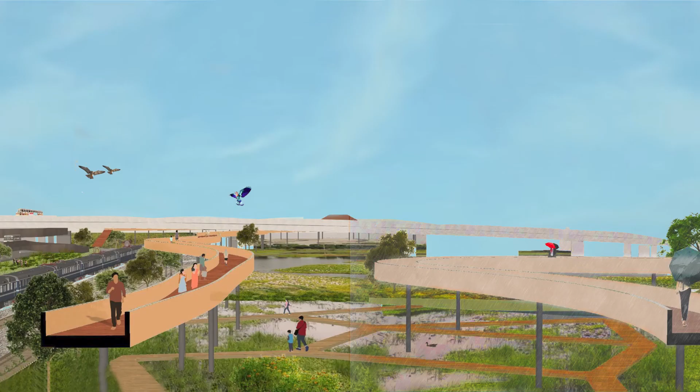So we are looking at one of the interventions that this team has done for their Ente Kochi, and we are going to look at the presentation to understand the strategies or the kind of ideas they have put in through landscape design. So let us proceed now to understand the way they have taken this.

Firstly, we would like to thank LS Raheja School of Architecture and New Arc Unlearn for giving us this opportunity to present our design proposal titled Jalapaatha, Envisioning a Wave of Life, which was submitted as part of the Mullassery Design Precinct, which was a part of the Ente Kochi competition held in August this year.

When we approached the brief, we had a few questions in mind. What scale of influence should we consider when we address a problem of urban stature? What are the benefits of reviving a man-made canal system, and what is its impact on the larger ecosystem? Given that the natural landform of the coastal plains is disrupted irreversibly by urbanization, how do we build resilience for the future? Traditionally, water systems have been associated with social, cultural, and ecological significance. How do we bring back this aspect of the link between man and water?

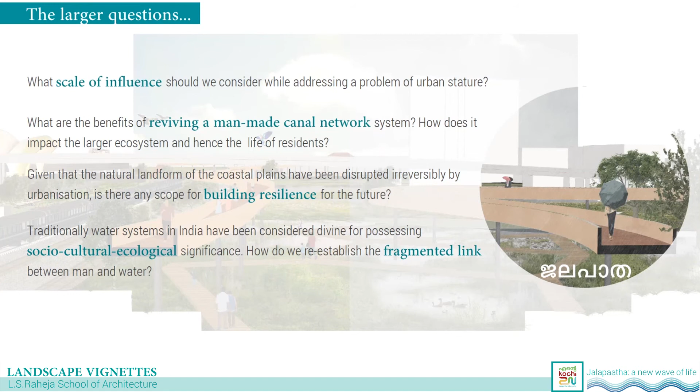So the relation of the canal to the larger context has been analyzed by examining the canal at three distinct scales, from a macro level to the site scale. The scales have been determined not based on the physical or administrative boundary, but we've broadly taken the area based on the ecological role played by the canal with respect to the larger natural systems. For each of the scales, while a few layers helped in understanding the larger natural systems, for the presentation, we'll be elaborating on the ones which have a direct influence on our design intent. Moving on to the next slide.

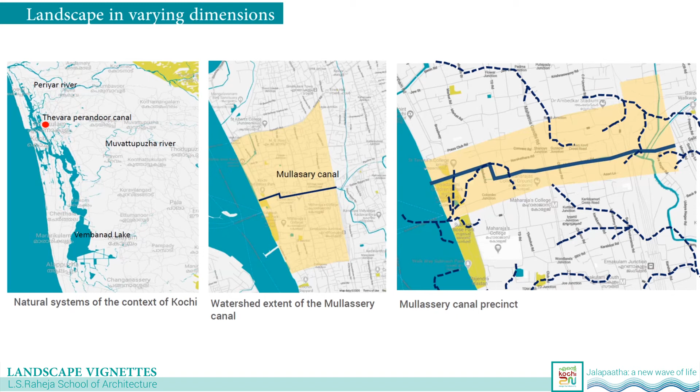So at the larger scale, we started with the understanding of landscape parameters such as climate, geology, and the soil strata. The original landform of Kochi comprised of alluvial bands with north-south orientation of alternating swales and sandbars. This enabled in channelizing the natural runoff from the region into the sea. With the advent of urbanization, there was the creation of artificial ridges which disrupted the natural watershed.

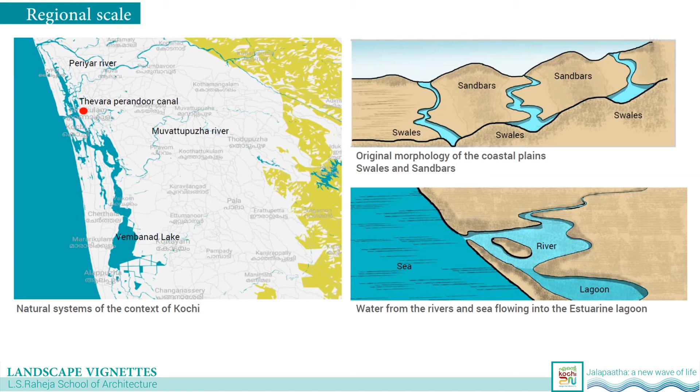Also, in the regional study, we realized that there are two main rivers which drain into the Vembanad Lake, which is the largest estuarine lagoon in India. This lake is a freshwater system during the monsoon and becomes a brackish water system during the dry seasons. Next slide.

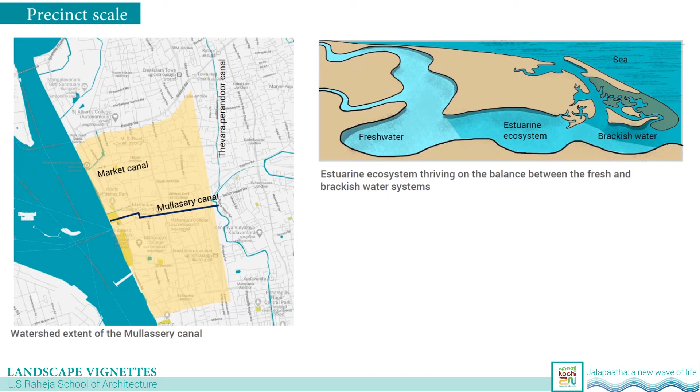So narrowing down further into the Kochi sub-basin, there are a number of streams which originate from the eastern lower hills, which meander across the flat terrain of the coastal plains and then drain into the sea. Also, we realize that the watershed is of a rectangular profile, which signifies more time of concentration and lower rates of runoff across the terrain. This creates the possibility of creating water detention structures along the canal precinct. Also, the drainage texture is coarse, which facilitates the percolation of water into the lower strata.

Also, there exists one main canal which runs parallel to the coast, which is this Thevara Perandoor Canal. And also, we have these subsidiary canals which run perpendicular to it. These perpendicular canals bring in the saline water from the sea into the Thevara Perandoor Canal. The Mullassery Canal, which is our site, creates an estuarine habitat, striking a balance between the fresh water from the Perandoor Canal and the saline water from the sea.

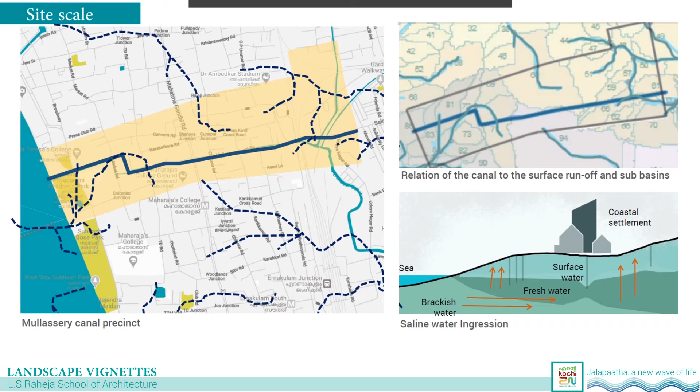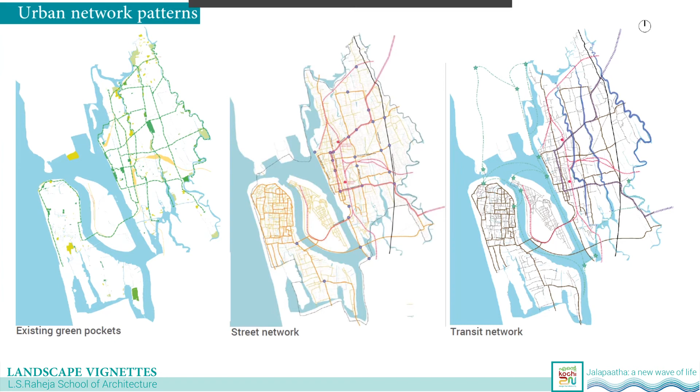So zooming further into the Mullassery Canal precinct, we observe a variety of urban practices that have resulted in the site being vulnerable to periodic flooding, vector-borne diseases, saltwater ingression, biodiversity loss, to name a few. The micro wetlands of the site have been converted into lands for development, and the canal itself has shrunk in its capacity to carry the overflow from the Perandoor Canal in the east and doesn't accommodate surface water discharge.

Seasonal tidal flooding from the western backwaters is also a concern that needs to be addressed while building dense urban blocks in proximity to this area. So this was in brief our landscape analysis for the site.

So the landscape study helped in establishing the role of the canal in today's scenario. In brief, the canal plays two important ecological functions. One is in creating a balance in the estuarine ecosystem, and the other one is in minimizing the saline water ingression. This established the premise for the revival of the canal, and additional interventions were looked at for the precinct to create a resilient landscape. Next slide. So the concept, strategic framework, and the master plan will further be discussed by Sivagami.

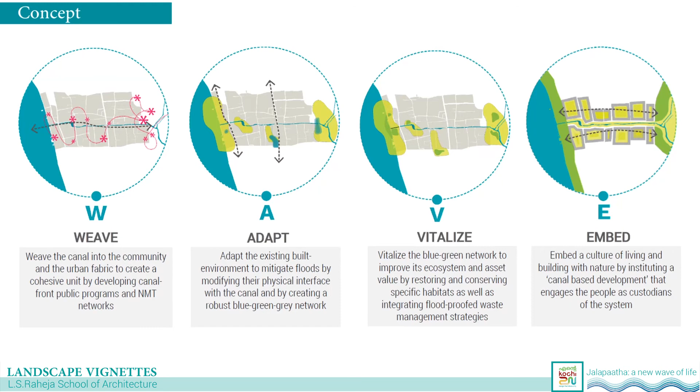So looking at the concept, we realized that the site needed an overhaul of systems as well as a new perception in which the natural ecosystem had to be viewed. We proposed the concept of a new wave of life, WAVE being an acronym here, where W is to weave the canal into the community, A is to adapt the existing environment to protect against flooding, V is to vitalize ecosystems and natural habitats local to the site, and E is to embed a culture of living and building with nature. Next.

In order to conceive a project based on the concept, we divided the site into logical parts, institutional, commercial, and transit hubs, which can then be planned together under the larger canal-oriented development, which comprises of planning and landscape strategies and regulations. Each hub may have a unique set of planning and landscape solutions based on the nature of the development in that hub and the nature of the natural systems and their physical connection to the canal.

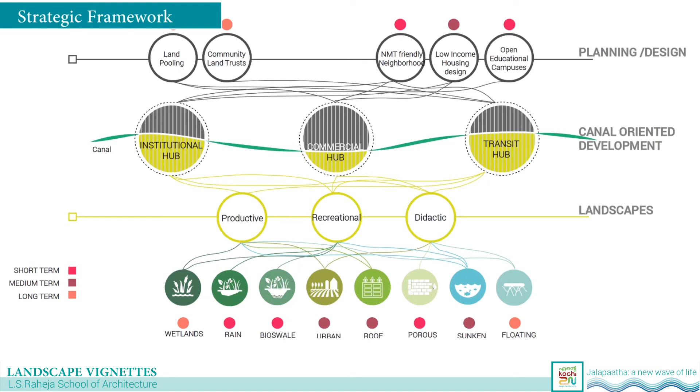Incorporating landscape solutions of 3 different types was also thought of, that is productive, recreational, and didactic. These solutions, apart from acting as open public spaces, also act as effective stormwater infrastructure. For a radical transformation, it is imperative to consider a phased implementation. The idea is to begin with short pilot projects, which have also been suggested briefly as part of this strategic framework. Next.

The nature of stakeholders plays a central role in the process of translating the concept to reality. We consider here that the canal itself is the primary stakeholder, a living entity that is connected to others in meaningful ways. Community land trust could be seen here as a way to provide affordable housing to the low-income families and reconstitute individual residential plots into a cohesive whole in order to enable working together to protect a common resource. Next.

The canal-oriented development, therefore, is envisioned in the three hubs respectively as an educational campus, a mixed-use zone, and a residential block. The educational campus is planned along with a connection to an active, non-motorized transport-friendly edge of the canal as well as a recreational landscape feature. Next.

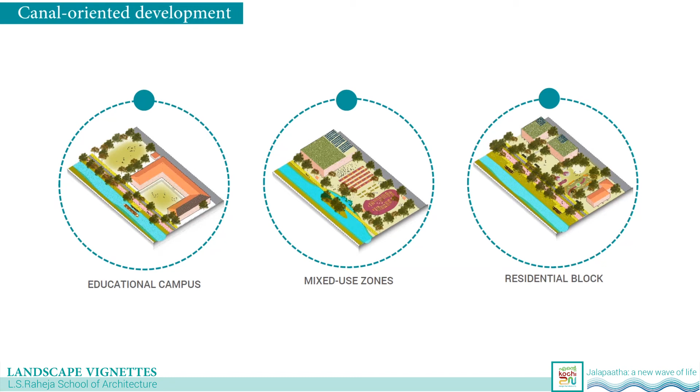A mixed-use hub may constitute didactic, recreational as well as productive landscape solutions such as roof gardens, urban farms, hydroponic farms, and community gardens. Next.

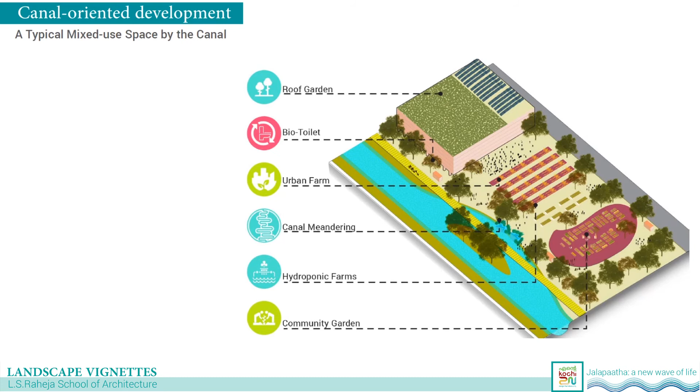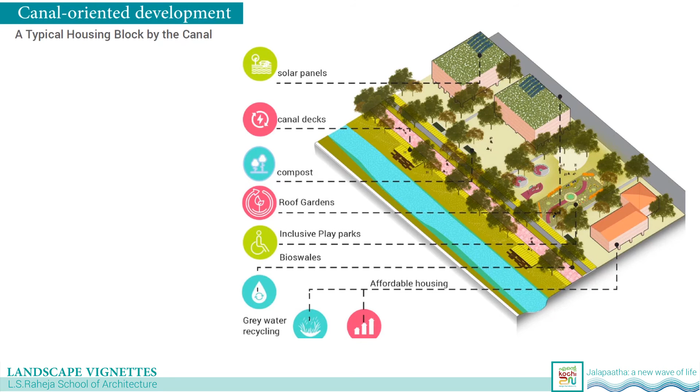The residential block emulates the characteristics of the mixed-use zone in addition to providing sustainable, affordable housing solutions. For instance, we've used solar panels on the roofs along with roof gardens and inclusive play parks. Next.

Now let's look at the master plan. The canal programmatically interacts differently at different portions of the site. The dedicated NMT network that acts as a primary horizontal connect enables the last mile connectivity for the metro and bus terminus while suggesting an alternative route for vehicular traffic.

Moving from west to east, the coastal edge constitutes a recreational and institutional land use, allowing scope for the creation of public spaces that can multiply as water storage and collection facilities. The central site, which is Site B, reconfigures the market experience by including the canal as an element connecting programs such as a transit plaza, the Fashion Street, and the Maharaja Ground.

The connection of the Mullasary Canal to the Perandoor Canal is a vital ecological node and is sensitively integrated into the design of the KSRTC bus terminus and the wetland park. Next.

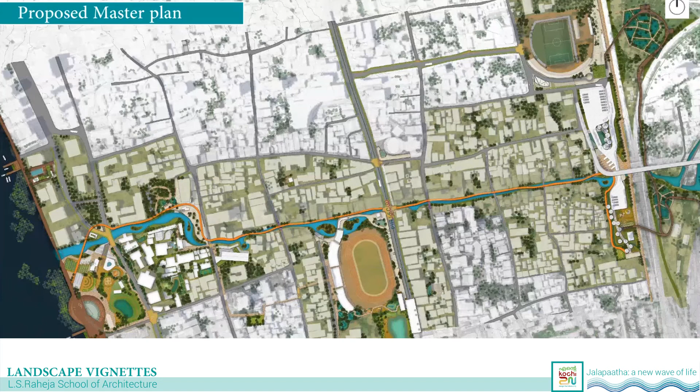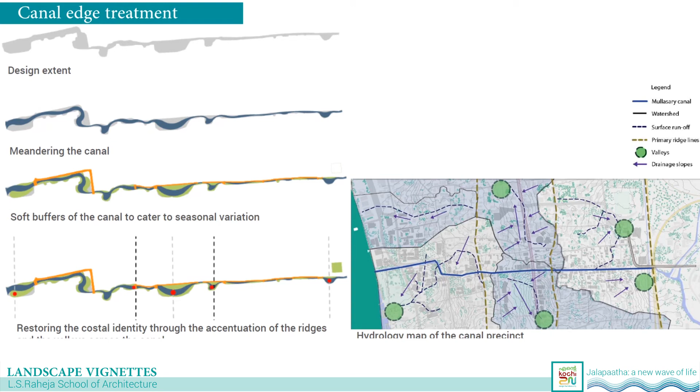Deriving from the landscape study, one of the ideas was to restore the landscape identity of the coastal plains by accentuating the flat terrain of the site in the form of alternating ridges and valleys. The idea was to break the rigid edges of the canal and meander it across the site with an elevated design node in each of the three sub-basins, highlighting the ridges across the terrain and deepening the canal at the lowermost points to indicate the valleys. Next.

In spaces where there is sufficient width, the canal has been widened to create smaller islands within it, which creates microhabitats for organisms. These edges have also been made accessible through stepped terraces. This is present in the institutional zone and would act as a spillover space for the students as well. In areas with space limitations where the width of the canal becomes narrow, it is maintained that way for unobstructed flow of water. Next.

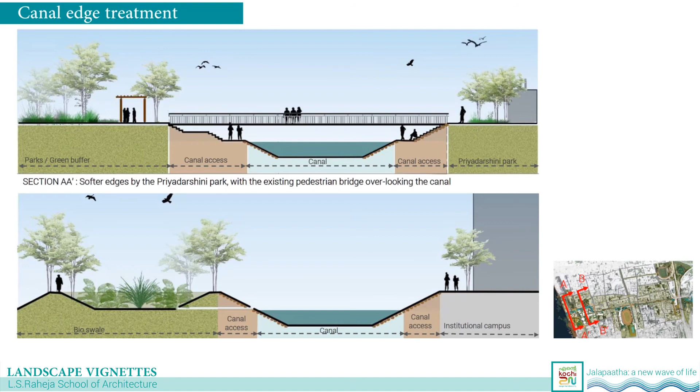Depending upon the land use of the subsites, the character of the canal has been accordingly articulated to create an open space which is woven into the surrounding context. Next.

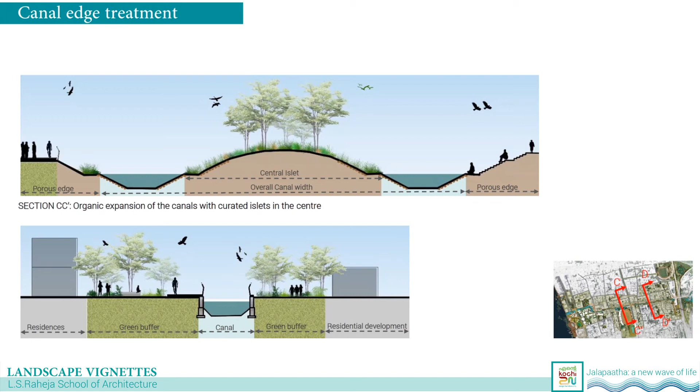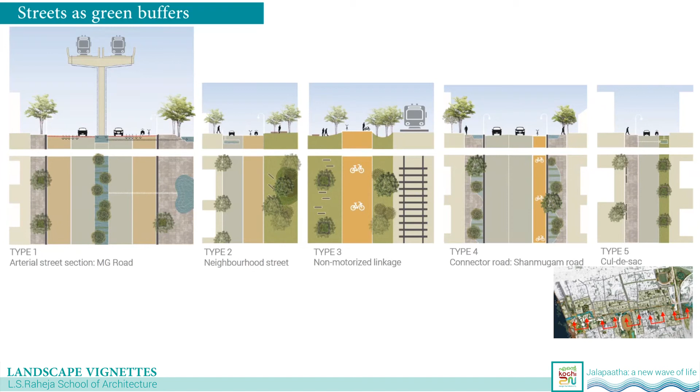Type 4 street section cuts through a connector street such as the Shanmugam Road along the institutional campus, which accommodates a dedicated cycle track alongside a linear bioswale. Next.

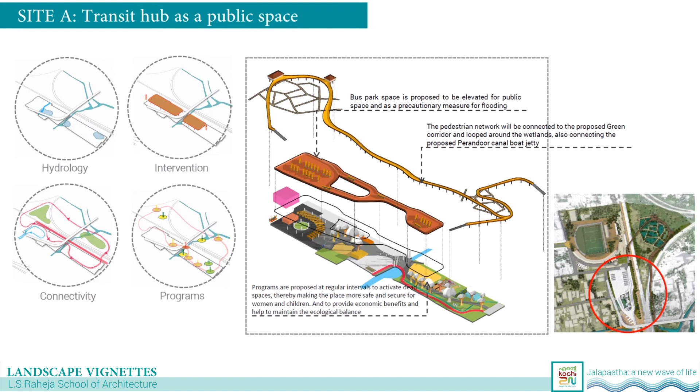The KSRTC land on the south gets freed up to be converted into a public park when the bus parking has been taken to the elevated level, and hence the freed up portion can serve the residential neighborhoods and become an identity to the place. Next.

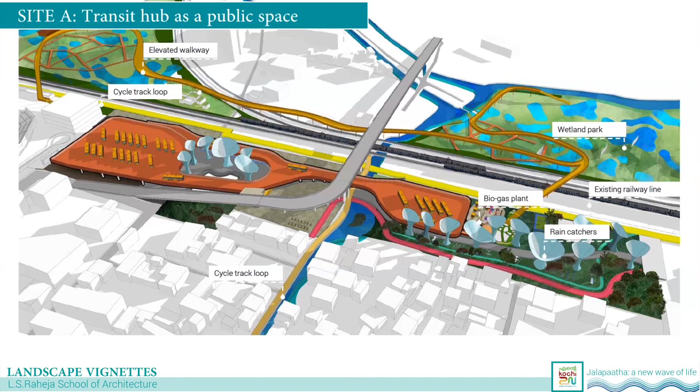Design elements have been incorporated in such a way that it adds both aesthetic and sustainable values to the KSRTC complex. For instance, the rain catchers help channelize rainwater into collection points while also providing a design language for the state service.

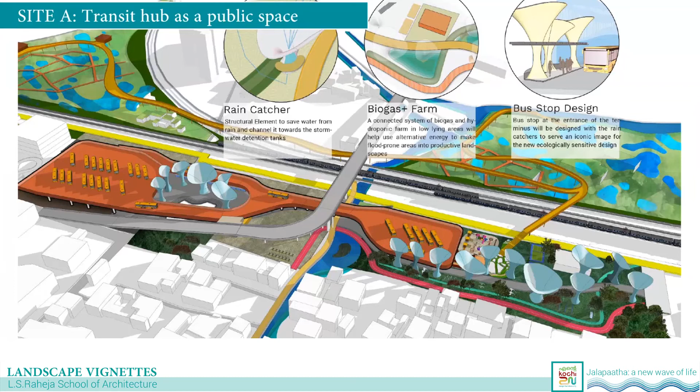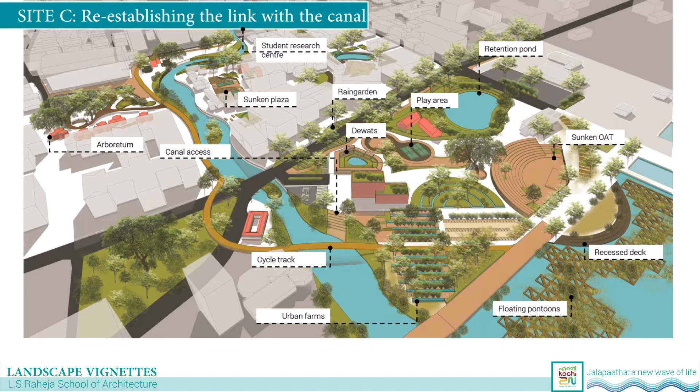Site C is characterized as an institutional hub but is mixed with other uses, making it imperative to suggest sensitive in situ solutions. A series of in situ solutions are made. The Marine Drive, for instance, is enhanced. Floating pontoons are introduced along the sea to attenuate high tidal waves. Priyadarshini Park, which is the large green space existing over here, is modified to enhance stormwater retention, and along the canal front, low-income housing is reimagined to build resilience.

The existing secondary waste collection is located away from the canal banks. Accessibility of the Jewish cemetery is established by introducing visitor-centric programs and an arboretum housing native species for viewing and educational purposes. A publicly accessible research center is designed along the institutional campus with a built form creating open and semi-open spaces for interaction for students along the canal.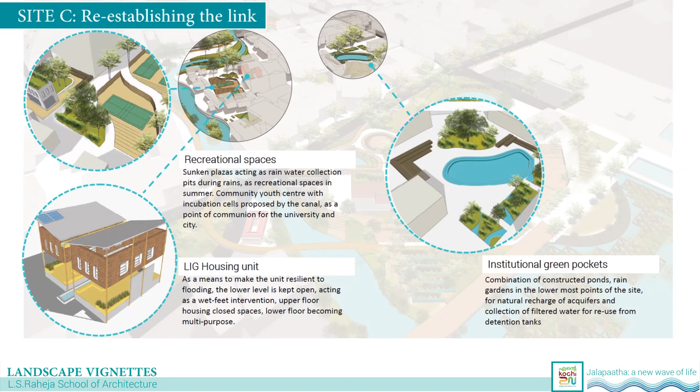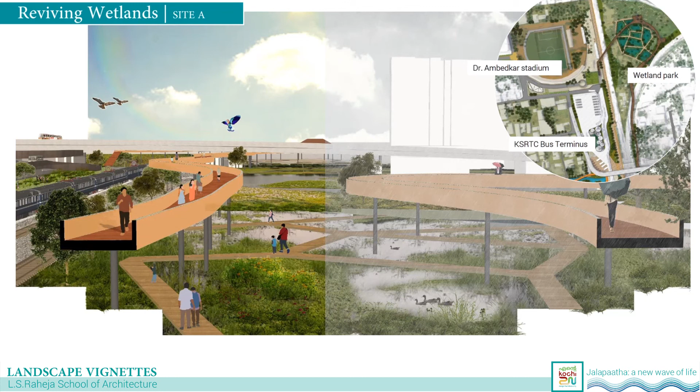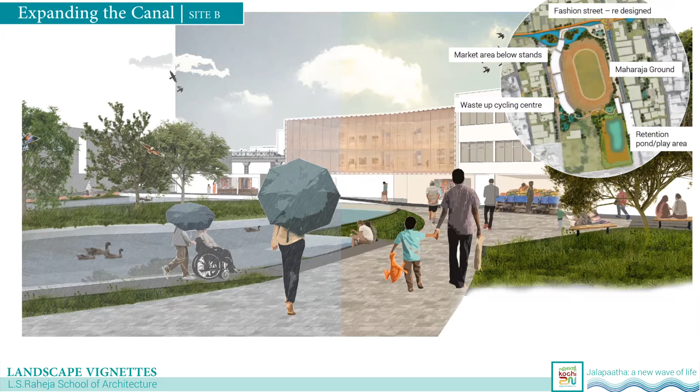To summarize, we will take a look at the views of the different sites. Site A, this shows a view of the reviving wetlands. This shows the constructed wetlands, which is conceived as a public space connected to the KSRTC via the pedestrian bridge that you can view over here. This is a visualization of the market zone in Site B, where the canal has been expanded and becomes a public space feature that merges with the market strip. That functions as a rainwater collection pond during the monsoons and as a vibrant public space during summer.

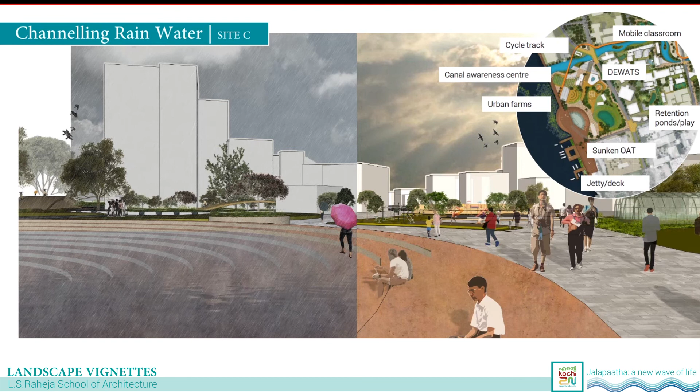To conclude, these were our inferences. Water can be perceived as a need, resource, opportunity, or threat based on the design solutions proposed. With the growing rate of natural disasters due to climate change and rapid urbanization, it is imperative for us to design and build our cities without disturbing the balance in the ecosystem. The design of our built environment from the macro to the micro scale can significantly impact the way we live. Apart from creating buildings that appear to be green, it is vital to have a more comprehensive approach to build sustainable cities. It is important to understand water and cities within a larger notion of a constructed ecosystem.

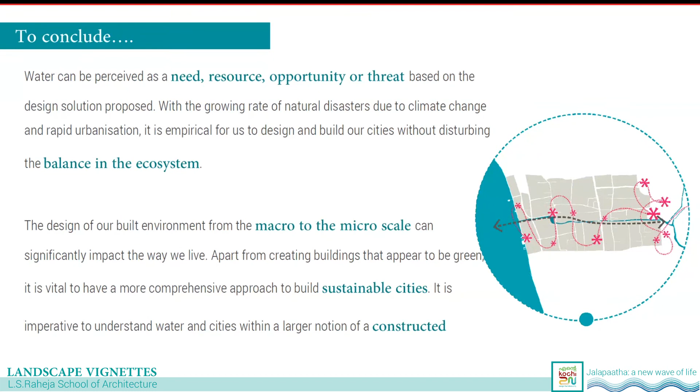Wonderful presentation by Team Wave, and I really like the concept where you introduced Wave and tried to weave, adapt, value and embed these ideas, introducing a lot of rain gardens, concepts to harvest, and trying to give the earth back the resources that it really wants to have. Many congratulations to you all, to Team Wave.

And I would like to ask a few questions, based on the experience of your working in this particular competition. So the first question: you have pinpointed your regional analysis as a very important part of your understanding of the needs of the city, right? Would you say this analysis, derived by landscape architectural methods, helped you develop a holistic way of arriving at the role of Mullassery Canal precincts in the city of Kochi?